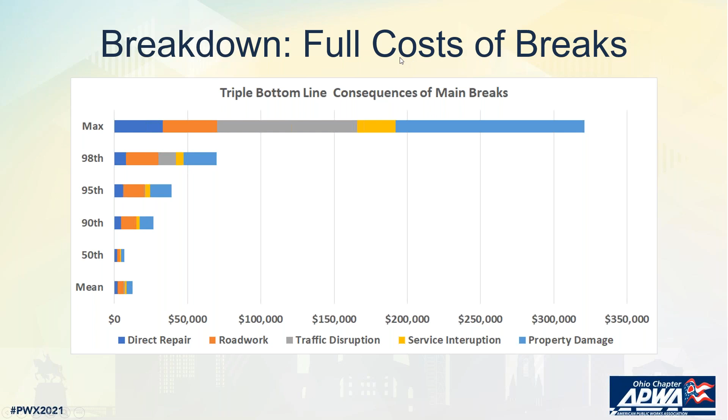The rest of those costs are really societal impacts that you don't feel directly as a utility, but things like traffic disruption, service disruption, and property damage. Certainly for your largest breaks, those societal impacts are much larger. So it's important to understand, as you think about the consequences of breaks, that they go well beyond just the utility.

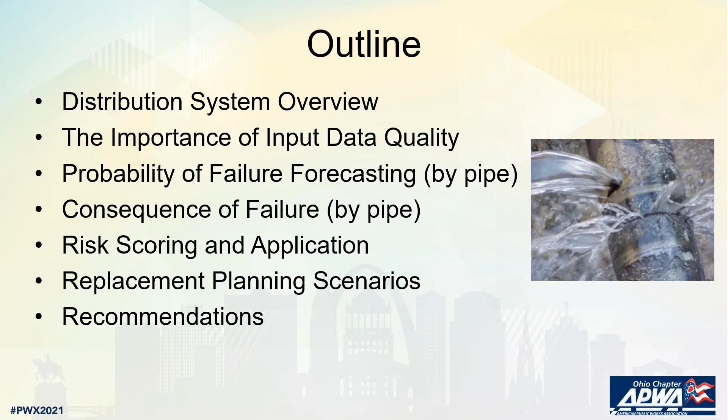And then we'll go over the recommendations that we made for Westerville. It's a very linear presentation, so hopefully you'll be able to follow along fairly easily and see how this might apply to your utility as well.

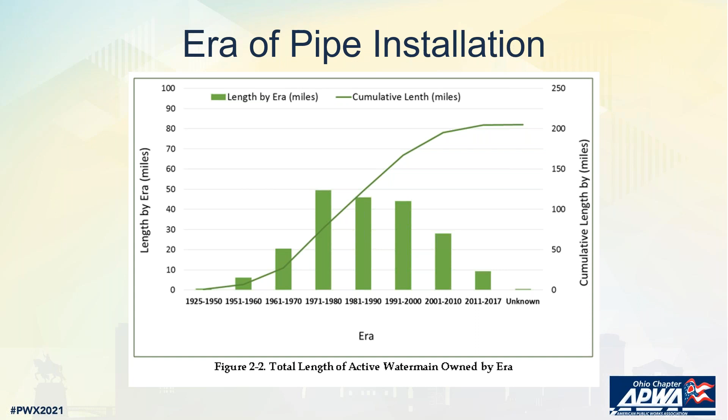So first we'll start with the distribution system overview. This is a graphic that shows the era of installation of the water mains in the Westerville distribution system. Development started in the 50s, ramping up in the 60s all the way to the height of development in the 70s through the year 2000, and then it's been ramping down since then as the city has built out.

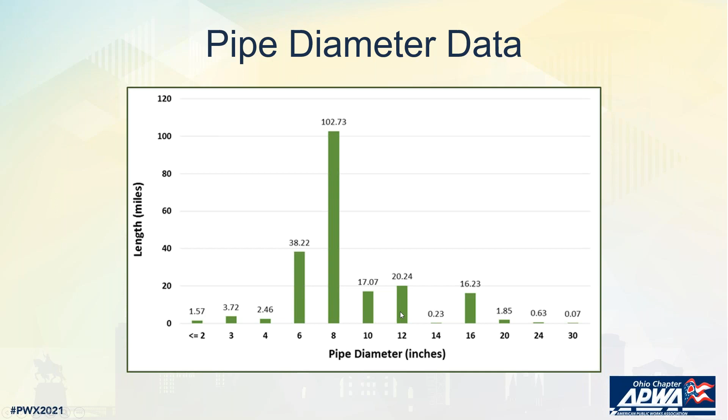So relatively young system by some standards, and we'll see the impact of that in a couple slides here on pipe materials. So looking at diameter of pipe in the system, it's predominantly 6 to 12 inch pipe, with some 16-inch pipe as well.

Based on the era of installation, you can see that the Westerville distribution system is made up almost exclusively of cast iron and ductile iron—almost 99% of the system.

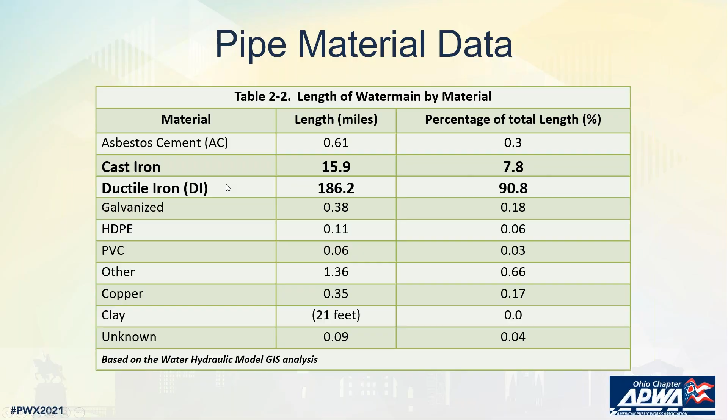Okay, so now we'll talk about break prediction and the importance of the input data and the review of that data. One thing you'll notice here is a screen capture from a software I was talking with Victoria about right before we started the webinar. This software is called Infrasoft, and it's designed specifically for analyzing water distribution system data and break data to make predictions about when water mains will break. It's very easy to actually use this software.

If you've got a GIS, you can basically just import your shape files for the water distribution system. Mostly what you need are very basic asset attributes: era or year of installation, size, and material. If you've got those things in a shape file, we can get started. And then of course you import your break database as well.

So as soon as you import those shape files into the software, you get this dashboard. This dashboard is basically a quality control dashboard. It's going to show you the number of assets, the number of water mains that were imported, and it also tells you if you have data quality issues with those.

For example, there are checks on whether you've got a date of installation for the pipe. If there's no date of installation, it would identify that 34 out of the 7,700 plus pipes didn't have a date of installation. 31 didn't have a material. There were 5 that had a bad diameter. There's a user-defined issue here where there was one pipe with a year of installation of 1190, which was probably 1990, just fat-fingered. So right off the bat, you can kind of see if you have any significant data quality issues.

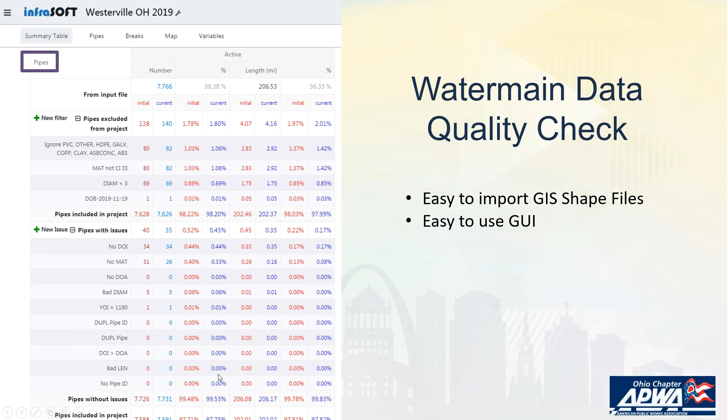What we found with Westerville's data is that there weren't many issues at all—0.5% of the pipes had issues. We have the ability to just ignore and exclude those pipes if we want to, and just move forward with the analysis, making predictions on the 99.5% that are in good shape if we wanted to.

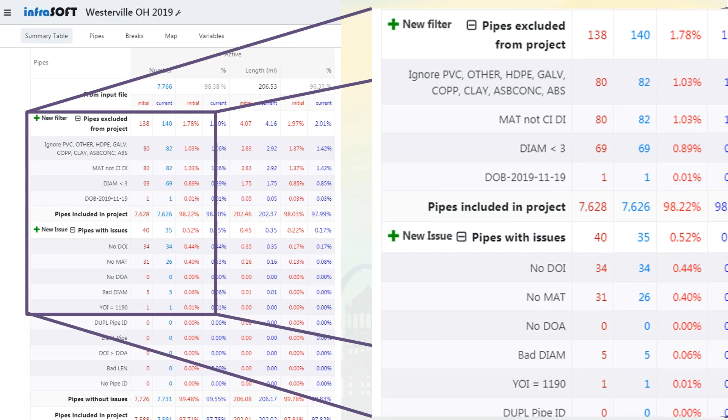Or we could click into this and actually see if we want to resolve any of the data issues. This would be really important if you're a utility that has data quality issues, more so than Westerville did. You can click on these 35 pipes that were identified with issues, and it brings up a list of all of those pipes, showing what those issues are.

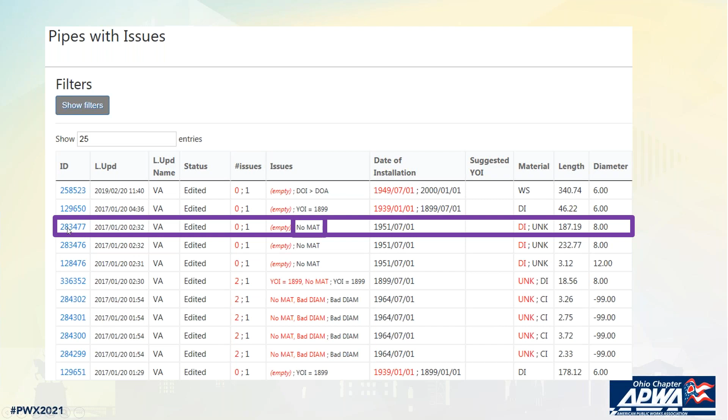I'm going to click on this one. This pipe right here had no material, and it brings up this interactive dashboard. The pipe in question is highlighted in this magenta shade, and I'm able to click on the pipes to either side. I was able to see that all three of these pipes, by the labels here, were installed in 1951. They all had the same diameter, and the pipes on either side were ductile iron pipes. So I was able to click into this and change the pipe material from unknown to ductile iron for the purposes of the analysis.

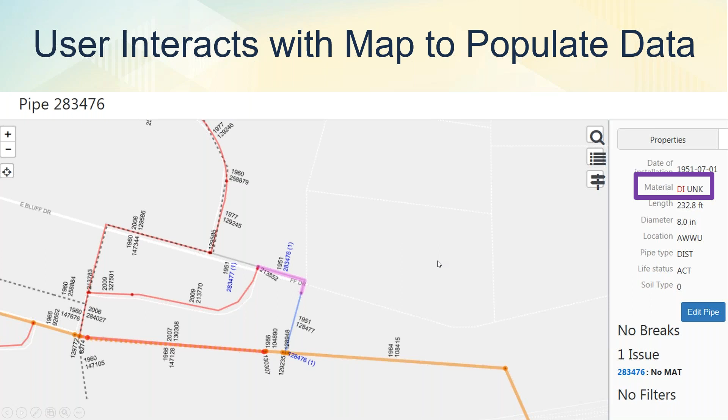As I mentioned, this wasn't much of an issue. I was able to do this manually for Westerville because there were only 35 pipes in question. So it made sense to go through on a one-by-one basis and try to resolve any data quality issues. We were starting with over 99% of the pipes having a known installation date, material, and diameter, as well as an asset ID.

For data sets that aren't in such good shape, the software we use, Infrasoft, has an artificial intelligence module that can populate that missing attribute data. I know for some people, the words artificial intelligence and machine learning kind of make you cringe - they've been overused over the past couple of years. But in this particular case, all it's really doing is following the same logic I went through in that example, where you've got pipes on either side with a known install date, same diameter, and you can make an assumption to fill in the material. Rather than having to do that 100 or 1,000 times with a really bad data set, you can have the artificial intelligence go through the exact same logic for you and save you a lot of time.

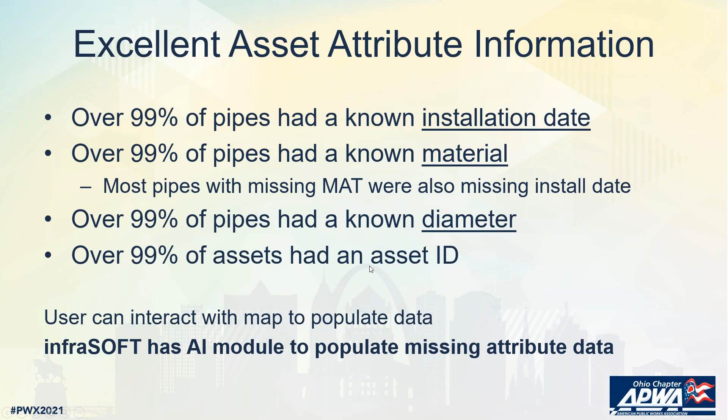It will create a list of issues. It doesn't go back and update the GIS automatically, but one of the secondary benefits of this process is we can take the data from Infrasoft, share that with the utility, and they can make a determination about whether they want to update their GIS as part of this project as well.

Okay, I'm going to jump down to learning objective number 3. We're skipping 2 for now - understanding the importance of utility-specific data. So why is utility-specific data so important?

I'm going to show you - this is for a different project we worked on about a decade ago. It shows for this system, which is a very large system in the Northeast US, what the cost of a replacement plan would be for their water distribution system going out to the year 2050 and the year 2100. You can see the size of that replacement program.

This is based on using industry assumed expected useful lives for pipe. So for ductile iron, maybe the expected useful life is 85 years. For cast iron, anywhere from say 70 to 80 years. Maybe for asbestos cement pipe, it's a lot less than that. But we just went out and used some industry assumed expected useful life values for that region and came up with this replacement program.

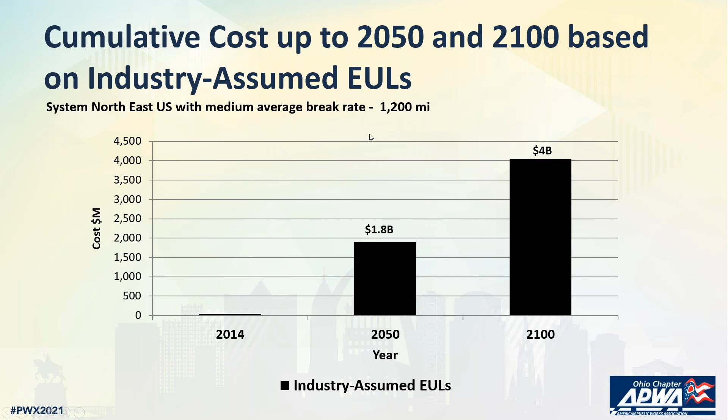Then what we did is we went back and used the asset attribute data and the break data specifically for the utility we were working with on this project. This is what the replacement program looked like in light blue. So we went from industry assumed expected useful lives shown in black to the utility specific expected useful lives in blue, and you can see a 65% reduction in what that proactive replacement program looked like - a reduction of $1.2 billion for them, and by the year 2100, about a $2 billion savings.

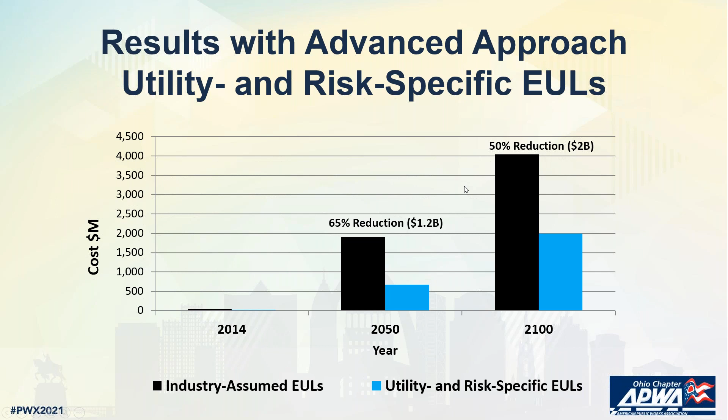I will say this is not necessarily going to be the case for every single utility. It could be that you've got particularly fragile pipe and that light blue bar might be higher than if you had based your replacement program off of industry assumed expected useful lives. In most cases, in my experience, it is lower because those industry assumed EULs, in my opinion anyway, are a little bit conservative. So it's a big push for you to use your own data to develop your replacement plan.

Your pipes are going to behave differently as well based on a lot of things - based on who installed them, who the manufacturer of the pipe was, what are the soil conditions, do you have aggressive soils, how do you operate the system and so forth. So it's really important to use your data if you can.

Okay, so let's talk about how we use that data now to make predictions about when pipes are going to fail. This is some data from Westerville again. This shows the average annual break rate based on the year, starting from 1988 all the way up to 2019. You can see this break rate.

Even in 2019, 2018, when we did this project, it's not a significantly high break rate. In fact, it's probably about the 25th percentile in the US, but you can see this big change starting at about 2009, 2010, where it really started to accelerate, and that's what drove this particular project.

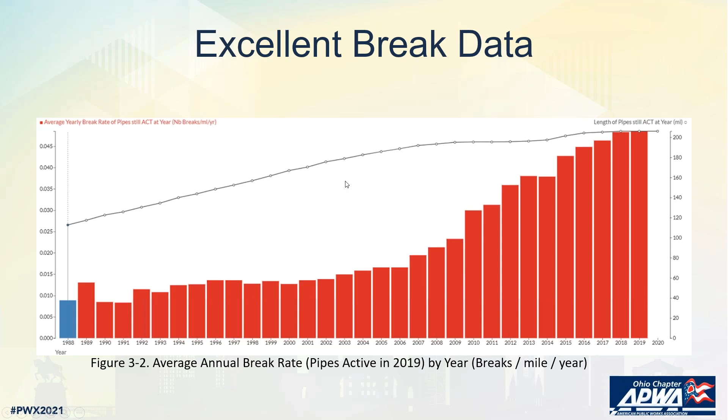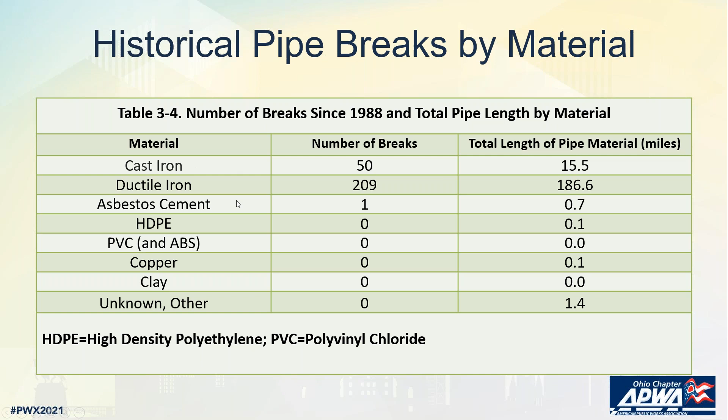So when we looked at historical breaks, what we found is because this system was predominantly cast iron and ductile iron, there was only one break on all of the other materials. So in terms of using predictive software, we couldn't use that software for HDPE, PVC, copper, clay, etc., because you can't make a projection based on one or zero breaks. We really focused in on cast and ductile. For those other materials, you can go out and use the industry assumed expected useful lives. But for the 99% that's cast or ductile, we imported break data to start to form the basis for the predictions. Same type of dashboard comes up as part of the Infrasoft software when you import the break data.

So it looks at issues like, is the date of the break on the pipe before the installation date of the pipe? Obviously that can't happen. We found 4 pipes where that was the case. It could just be that the pipe was replaced at some point, so the installation date was updated, but the asset ID didn't change.

We also wanted to exclude utility hits. What we're trying to do with the software is predict the degradation of pipes. A utility hit can be excluded from that because it's just going to skew the results.

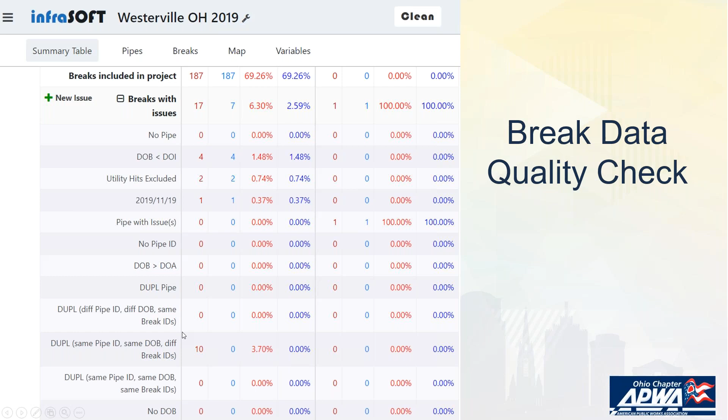We had a date of a break of 11/19/2019. That was after we started the project, so we knew there was a mistake there. And then we looked at a few, there were some duplicate breaks - same pipe ID, same date of the break, just a different break ID. We think we were able to verify that there were 5 breaks that were just entered twice. So we were able to exclude those breaks from the analysis so we didn't skew the results.

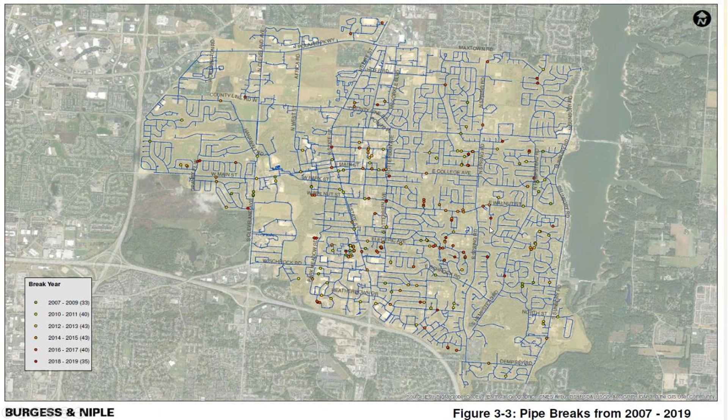All of this is done, and you can display all of this on GIS. The Infrasoft software talks back and forth with GIS, and in some cases it can help you visualize where there are some clusters of breaks in some areas and where there are less in other areas.

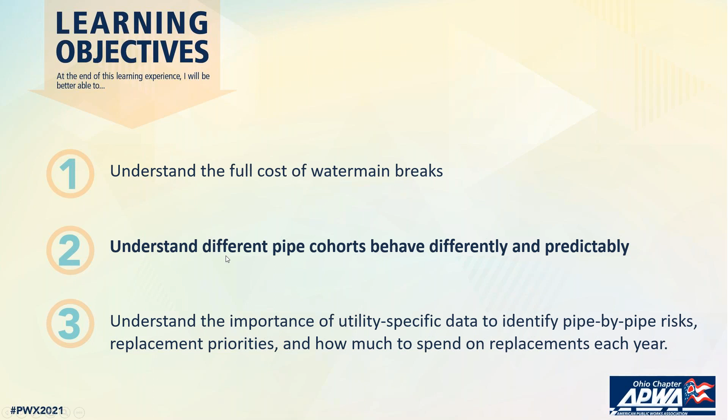Okay, so let's talk about how we use that break data and determine which pipes are behaving really well and which ones might be representing the biggest risks and problems to the system. We can see through the software there are a number of automatically generated graphics that we use to help us with our analytics. The first, we look for a relationship between the break rate and material.

As you would expect, break rate is very heavily correlated with the material of the pipe, and we can see that here. We've got cast iron in green, ductile iron in red, and the height of the bars represents the break rate. For cast iron, it's about 16 to 17 breaks per 100 miles per year. For ductile iron, it's a little bit less than half that - just under 8 breaks per 100 miles per year.

The age of the pipe is shown here by this line. We can see that the average age of ductile is about 30 years old, and the average age of the cast is a little bit over 50 years old.

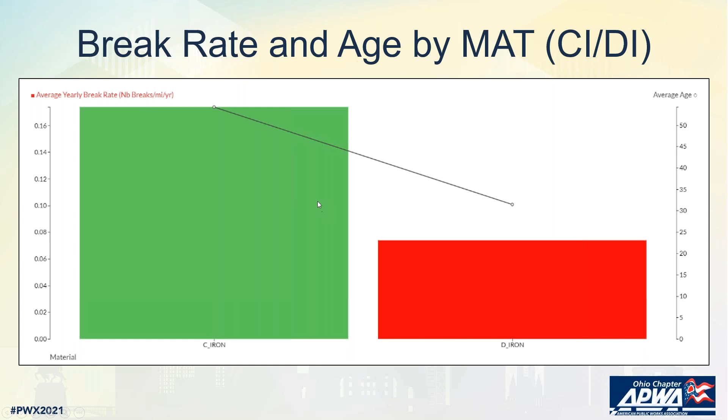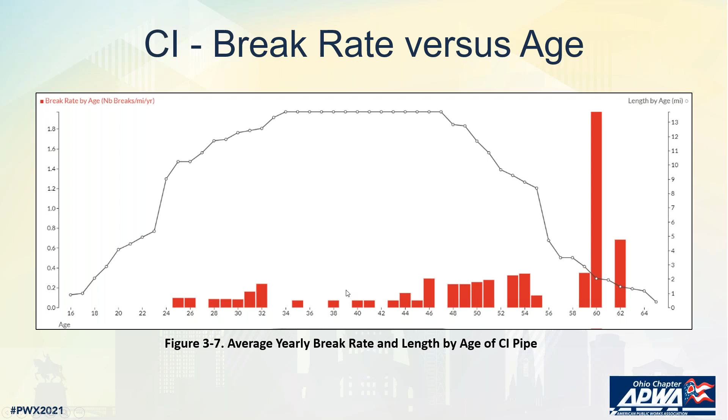We also looked at the break rate versus age. We've got the age of the pipe on the x-axis here, the break rate on the y. As expected, we were able to see a trend in the rise in the break rate as the pipe aged. This is for cast iron specifically, but we wanted to make sure we're seeing these trends that we expected.

We also look for a relationship between the break rate and the diameter of the pipe. Generally speaking, larger pipe has a larger wall thickness and therefore degrades at a lower rate and will have a lower break rate. That's exactly what we found with the Westerville data as well.

So the 4-inch pipe on the left here has the highest break rate. There's a little bit of an anomaly with the 8-inch pipe, but you can see the general trend is down. Break rate goes down as diameter goes up.

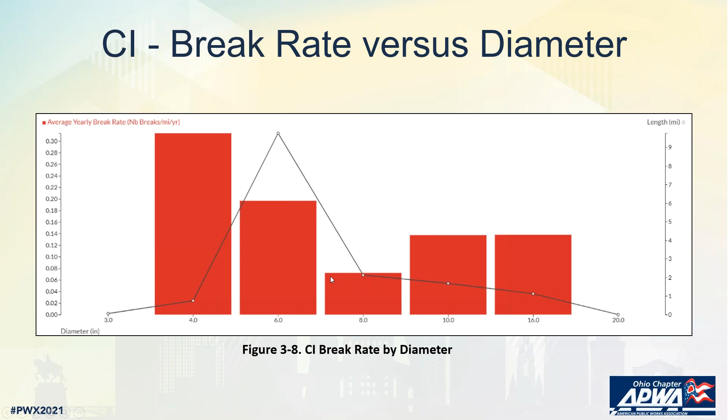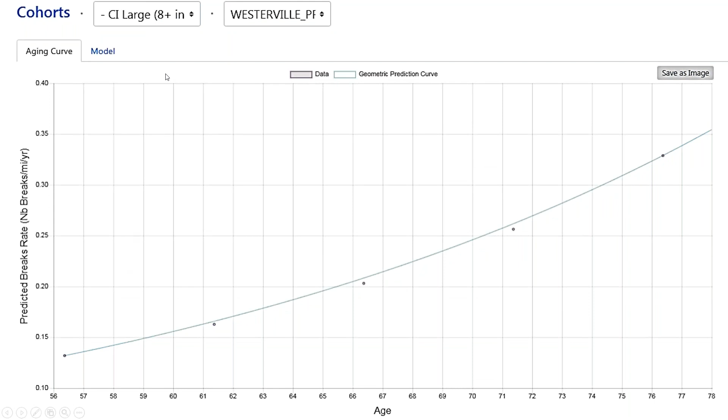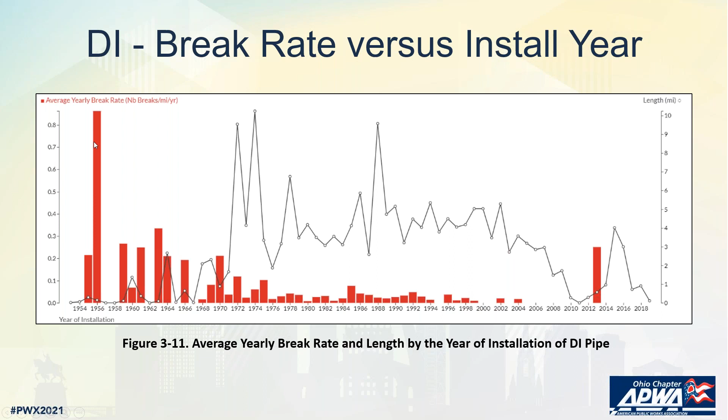We can develop these for large cast iron pipe, same with ductile. This graphic shows, rather than graphing break rate versus age, we graphed it based on year of installation. So the oldest pipe, going back to 1954, 1956, is breaking more frequently than the more recently installed ductile iron pipe.

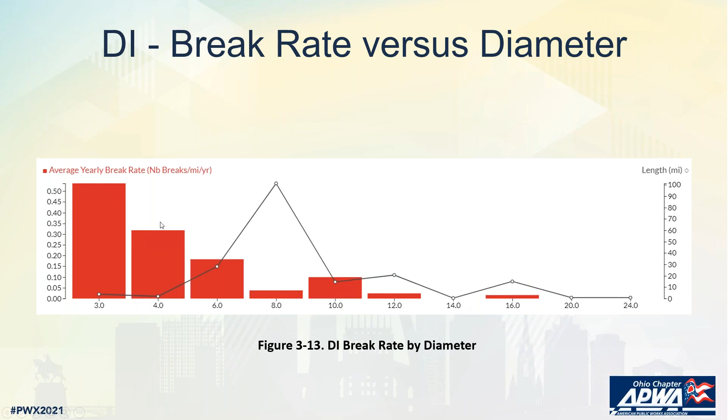This is the relationship of ductile iron break rate versus diameter. Same trend, where the larger the pipe, the smaller the break rate. And we can build these to show how different cohorts of ductile iron pipe are behaving.

In actuality, what's happening behind the scenes in the software is that there is a specific probability of failure being predicted for every single pipe in the system. So you could go to an asset ID, a specific pipe, and it would tell you the probability of failure in 2020, 2025, 2030, all the way out as far as you want to look.

Extremely powerful. When we bring that all together, we can make predictions about what the break rate in the entire system will look like under the do-nothing scenario, where you're not doing proactive replacement, just repairing breaks. You can see the break rate would rise pretty significantly, and that's what Westerville was really concerned about, like we talked about at the top, that they saw this rise in break rate.

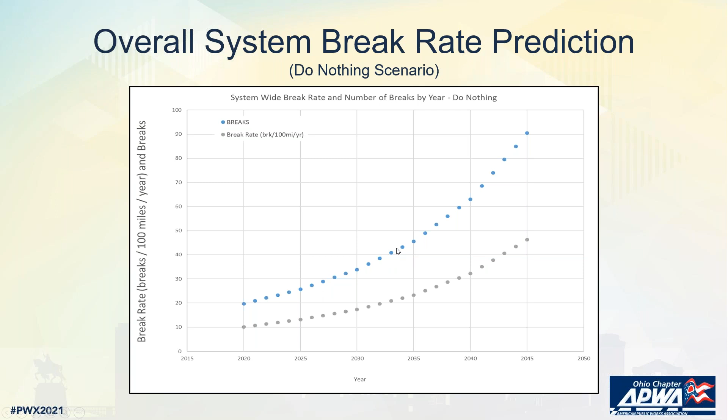What this says is from the year 2020 to about the year before 2035, the break rate was expected to double if nothing was done. So that's where the major concern was.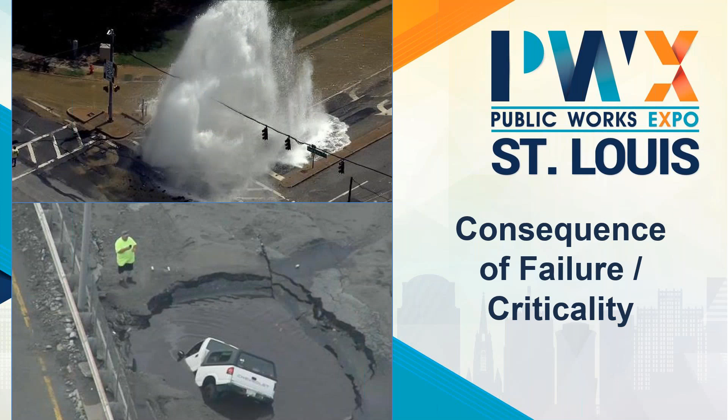All right, so let's talk about the other part of the risk equation. We talked about the probability side. Let's talk quickly about the consequence side.

There are a lot of factors that impact the consequence of failure when water mains break. So the diameter is something we look at because it's an indicator of what the potential property damage might be, what the repair might look like, and the number of customers that might be impacted by that break.

We also look at proximity factors. This is just done in GIS, where we look at different layers and how they overlap with the pipes. So are there intersections with roads, water bodies, structures, railroads, and other things that would increase the cost of the repair based on the complexity of the repair that would be done.

And then we also look at hydraulic consequences. What I mean by hydraulic consequences is when you have to do the repair on that main, if you can't do a live repair and you have to isolate that main, you close the valves. The users on that pipe will lose water service, and so we can estimate what the impacts to them are.

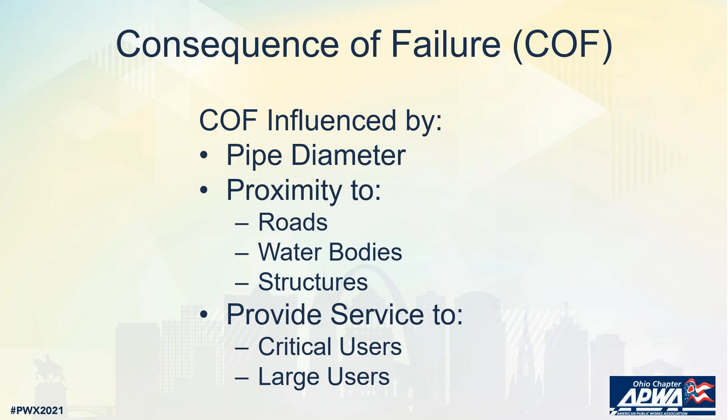So hydraulic and physical consequences, just kind of a look at how we do that. We use a 1 to 5 scoring system for each of these criterion.

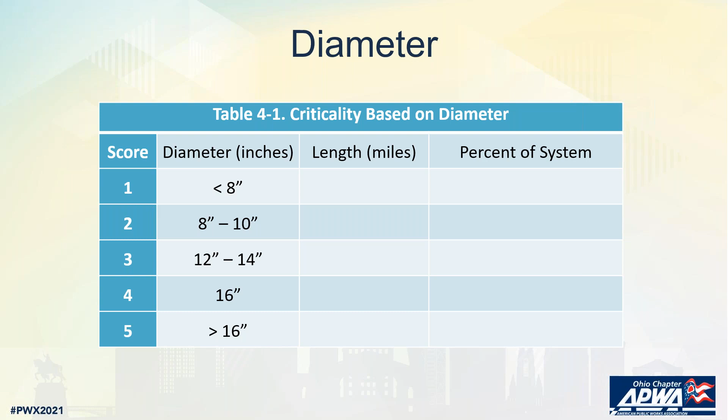This is just an example based on the diameter of pipe. If it's less than 8 inches, it could get a score of 1, all the way up to a score of 5 for a 16-inch or greater than 16-inch pipe. This 1 to 5 scoring system is pretty much industry standard through most asset management texts. This is how consequence of failure is often scored.

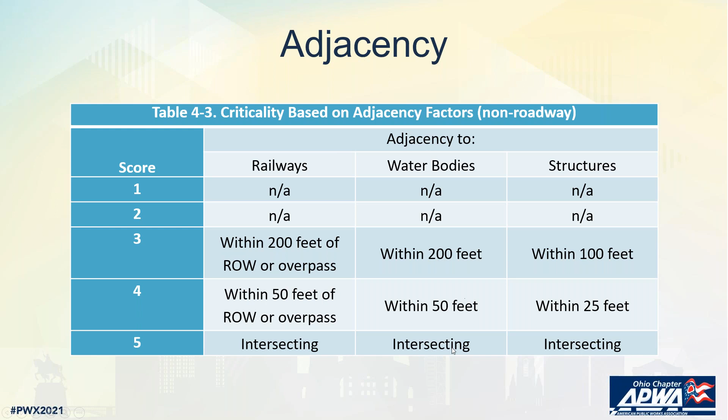Looking at adjacency to things like railroads, water bodies, or structures, you can set up similar criteria. So if you were looking at a water body, you could get a 0, or if the pipe is within 200 feet of a water body, a score of 3. If it's within 50 feet, a score of 4. If it's intersecting, it would get a score of 5.

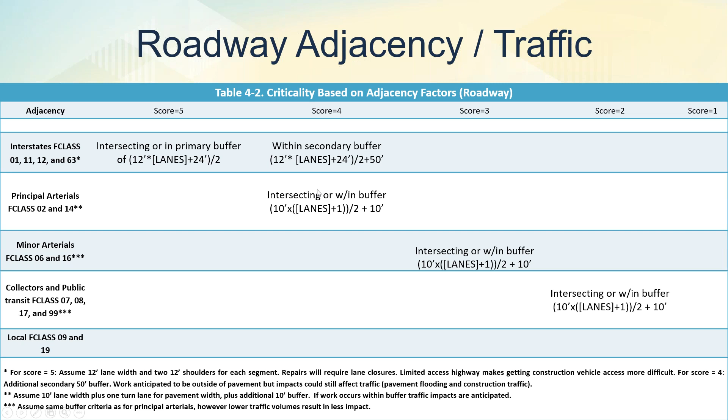If it was intersecting or within a primary buffer of a principal arterial, it would get a score of 4, and so forth. Scores go down as the classification changes.

Lastly, we can look at critical customers. Again, this goes back to hydraulic consequences. If you've got critical users that are wet businesses in your city, you'll want to know where they are and what pipes they're on. Examples are bottling companies. When I worked for City of Columbus, the Budweiser manufacturing facility was by far the largest user and the most significant customer, so there would be major consequences if they lost water service. But it could be other wet businesses too, like schools, hospitals, or dialysis centers where water is extremely critical to their operation. You can see how we gauge the impact based on what type of critical customer it is.

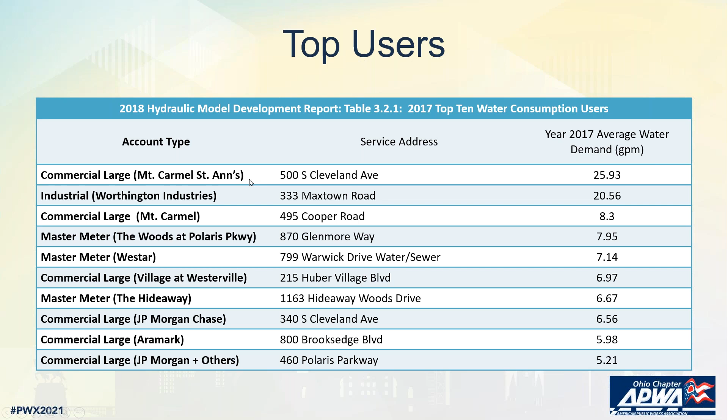We look at large users as well. This is the top 10 water users in Westerville, a summary of those top 10, and the pipes these customers are associated with were listed as high criticality pipes.

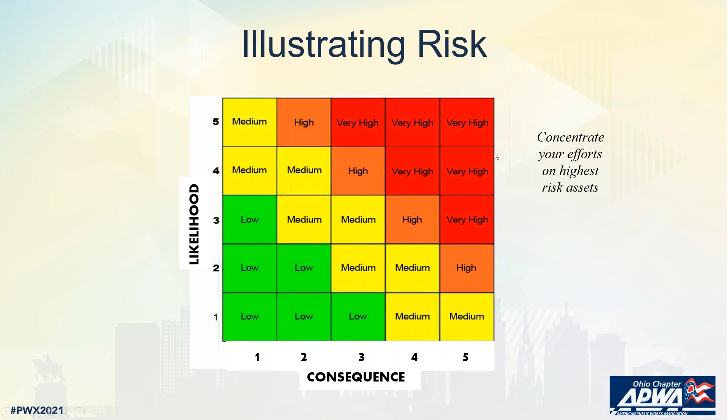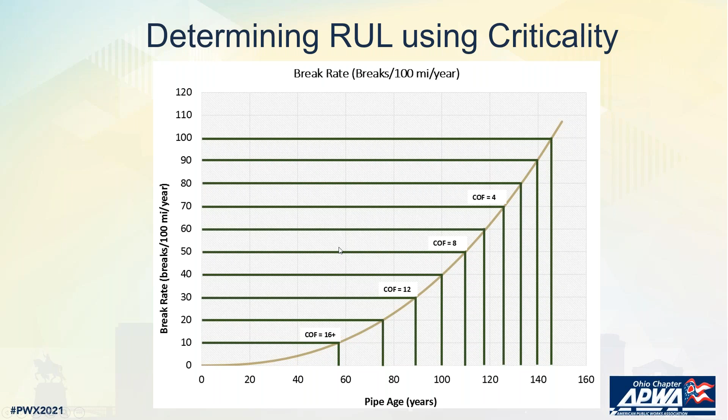So we can do this for every single pipe, and when we do that, it gives you a replacement plan for every pipe in the system. This is just a tabular way of showing what those green bars were. Each utility can adjust this, but it basically means we looked at consequence of failure scores from 1 to 20 and made a decision about the maximum acceptable break rate for pipes in each of those consequence of failure bins. That's how we developed that graphic.

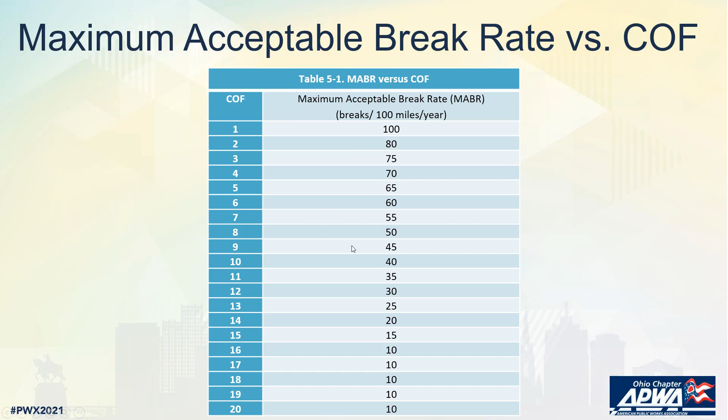We used that Water Research Foundation study I showed you at the very beginning, where they studied the true cost of water main breaks, and we were able to put dollar value costs on each of those breaks. We multiplied the cost of the breaks times the probability to come up with a monetized risk score, which becomes really important when deciding how much money you want to spend to replace pipes.

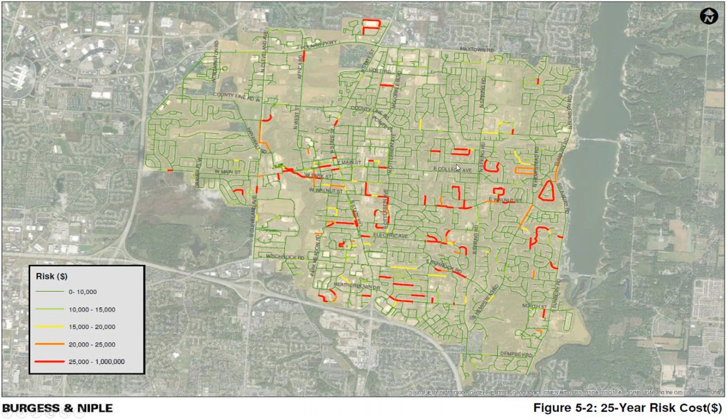Okay, so let's talk about some different replacement scenarios, and we'll wrap it up after that and show you the recommendations we made for Westerville.

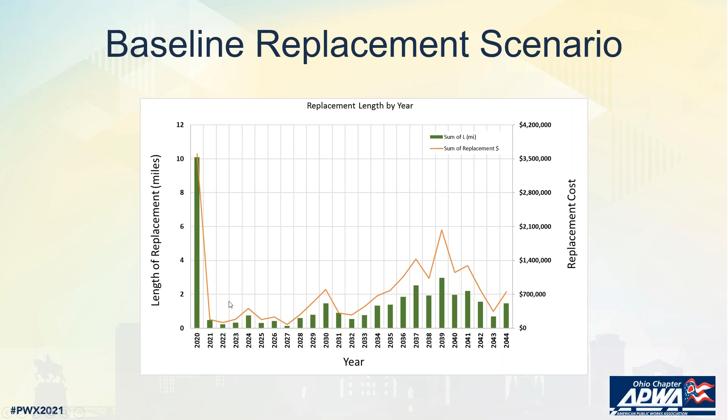These are actual replacements where we selected actual pipes. In green you see the sum of length we recommended be replaced in any given year, and the gold line represents what the investment level would be in each of those years.

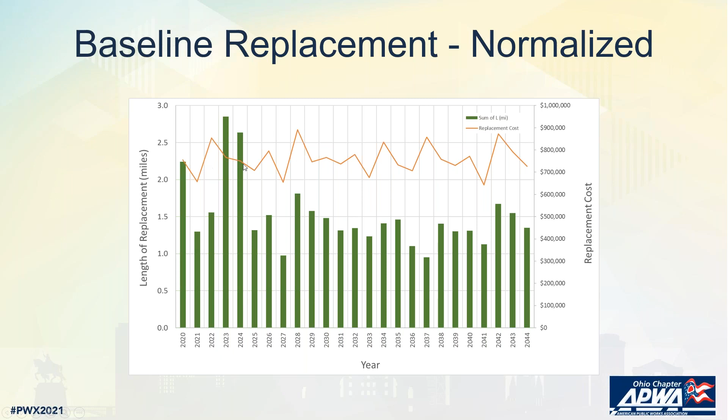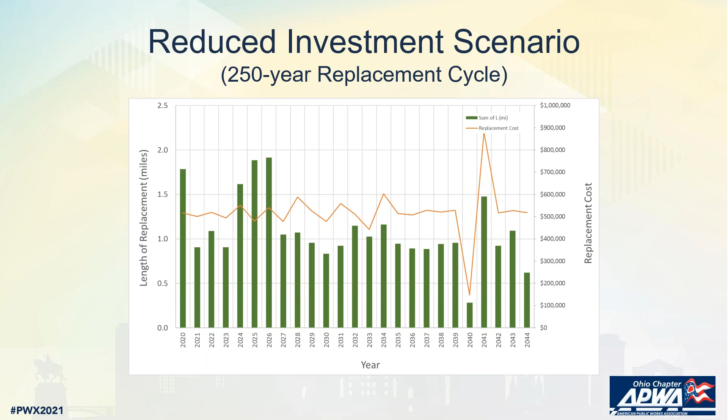We also looked at a scenario where we reduced the investment - instead of about $750,000, what if we reduced the average annual investment to $500,000? We wanted to see what the impact would be on the system-wide break rate over time, the number of breaks that would occur over time.

The number of breaks that would occur goes way down, then starts to rise again. The lowest cost, $500,000 per year investment, which represented about a 250-year cycle to get through the entire system - for obvious reasons, it doesn't have as big of an impact on the break rate early on.

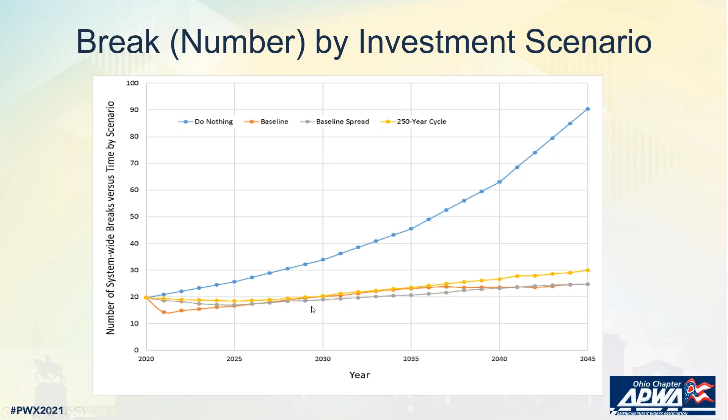But what we do see is a convergence, a pretty significant convergence around the year 2030. It starts to spread a little by 2035. But this told us that we really could get away with the lower investment level at the beginning, and then come back and reevaluate the investment rate in the year 2030.

So that is, in fact, what we did recommend - the 250-year replacement cycle. We know that's not sustainable; pipes don't last 250 years. But what we did was validate this recommendation.

We were able to look at the data and show that by replacing 5% of the length, it would avoid 36% of the future breaks between now and 2030. So what's happening in the Westerville system is there are a few really bad actors, some really bad pipe. If you address those early on, you'll address a majority of the breaks, and then you can go back in future years and reevaluate the investment scenario.

Again, the existing break rate is low right now, even though it's rising, and that was also another justification for starting out with the lower investment rate.

What we did after this project, as far as recommendations, was work not only with the Public Service Department, but also with the Planning and Development Department, and we correlated our recommendations to future paving projects to try to align those projects together and avoid costs like repaving costs.

So the city is continuing to track breaks, and they're going to reevaluate the replacement strategy. At the time, we talked about reevaluating within about 3 years, which would be this year or next. We also discussed changing some data management practices for abandoned mains.

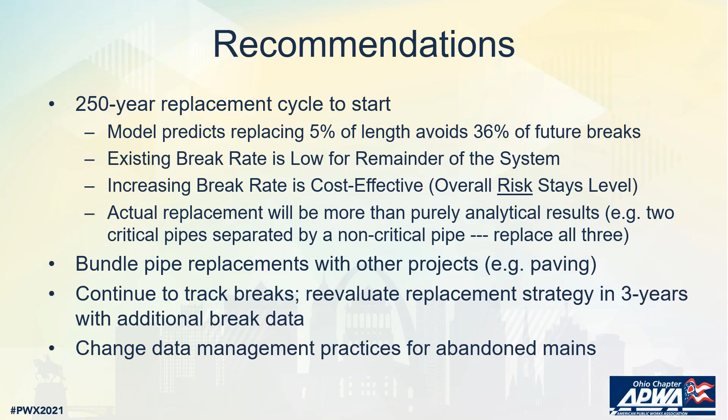So I put the word out now to folks listening: if this is something you're considering, you should think about preserving data for abandoned mains. That's what Westerville has been doing over the past few years, so that when it comes time to do the reevaluation, they'll have more data to work through.

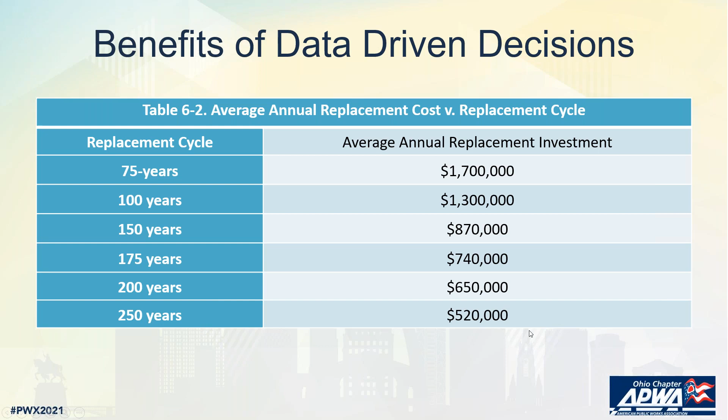So again, we just looked at these different investment scenarios. There was the baseline scenario, and ultimately we looked at that 250-year scenario, as I mentioned, and it came out to be about $520,000 of investment.

So why would you look at this advanced risk-based approach? Number one, more accurate projections, as we showed when you compare industry-assumed expected useful lives versus using your specific data. Number two, optimization of resources and savings - we were able to justify a much lower investment.

This type of tool, the analytics that we did, obviously gives you a lot of granularity, as opposed to just using 1 to 5 scoring systems for probability, where some folks are using just a 1 to 5 scoring system to determine when pipes are failing. If you use our approach and this software, you can get pipe-by-pipe probability of failure numbers, which gives you a much better ability to prioritize where you want to go in and do replacements.

We were able to explore different funding options, and I think one of the most important things is when you do this type of analysis, you've got a lot more confidence in your results. They're a lot more defensible, justifiable, and you can go to the powers that be, whether within your organization or to a city council requesting funding - if you need justification, this type of analysis provides it for you.

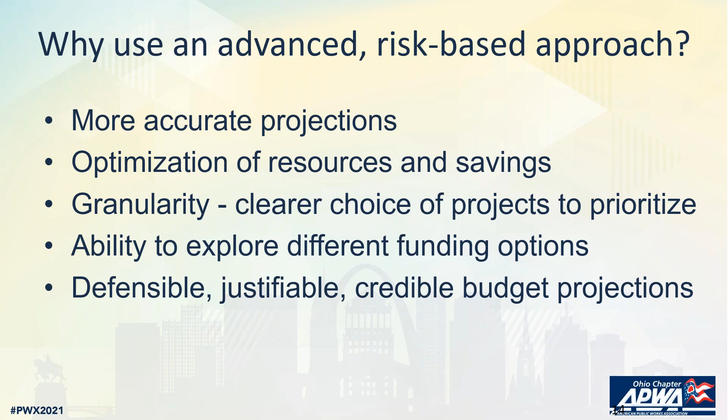I remember Dick Lorenz, one of the engineers at Westerville, saying going through this process finally gave us the ability to provide that number to City Council with some confidence and to justify that budget. So that's another benefit of the program.

So last but not least, my last slide here is something I took from PWX 21 last year. Right before I gave this presentation, there was another presentation about communicating, and it said 65% of the population learns visually. We remember only 10% of what we hear, 30% of what we read, and 80% of what we see. That's just another bit of advice for folks thinking about this type of program.

Those failure curves that we were able to generate through the software, the aging curves, as well as the risk graphics and maps, are extremely helpful in communicating up and out of your organization to justify these types of programs as well.

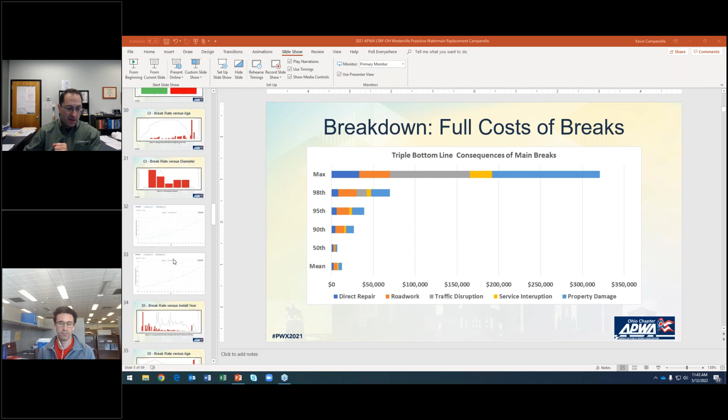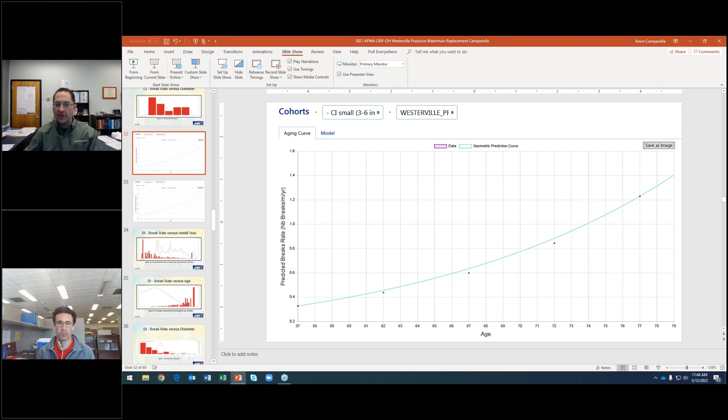I think by taking your existing information, meaning your asset attribute data and your break data, you can look at the break predictions on a pipe by pipe basis, but I showed those aging curves. Let me scroll down to some of those aging curves here. Right, so we had these aging curves that we showed for ductile, small ductile, large ductile. We had the same aging curves for cast iron. So based on the analysis and your understanding of how different materials perform in your system, we could make some recommendations about what would be best as far as replacement material.

There are some trends, obviously. If you go out and look at either Buried No Longer, which is an AWWA publication, there's a Utah State study that comes out every few years on pipe performance by material. For most communities, asbestos cement pipe was a horrible decision. Ductile iron pipe in most cases is a very good decision, particularly if you have it lined on the outside. A factory protective coating on the outside, I should say.

If you think you have aggressive soils, that would be something we would recommend. If you don't have aggressive soils, you might not need to pay for the protective coating from the manufacturer. Although I think we've heard from a number of manufacturers that they may make that standard in the future for ductile. But certainly you can take a look at this data and figure out what might be a good replacement material. I wouldn't do it without looking at your data.

Next question here is, did your water main replacement cost calculation include all costs such as backfill, pavement replacement, water service replacement, valves, hydrants, etc.? The costs that I showed, these investment costs at the end, when we looked at the different investment scenarios, the $500,000 level, $750,000 level, those were just direct costs. They didn't have the add-ons of engineering and mobilization, construction, administration, and so forth. So I think we added about 25 to 30% onto those costs, if I recall correctly, to get the overall soup to nuts cost to the city of Westerville.

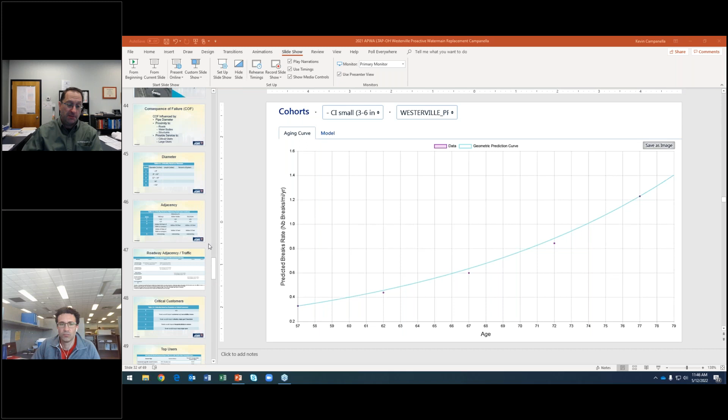Yeah, okay, so that's a great question. So service interruption, and I'll talk about a couple different ways that we can do that. Let me see if I can bring that up. So this is maybe a good way to explain that, Josh. When you have a break and you have to isolate that pipe to do the repair, you're going to interrupt service to potentially a variety of different types of customers. If they're residential, the impact is typically small. It's obviously a lot smaller if you can notify them, as well, if it's a planned repair. But when you have unplanned repairs, the impacts can be fairly significant.

And so we've got these types of customers in these different bins, 2, 3, 4, and 5. This goes back to that Water Research Foundation study, where we actually called all of these types of customers, and we asked them the types of consequences that they suffered, if you will, or experienced as a result of an outage.

So for example, a break that would impact a school. About 2 miles south of where I am right now is a middle school, I think it's called Hastings Middle School. There was a break there a couple of years ago. It happened at about 7:30 in the morning, right after all the kids got dropped off for school.

So we talked to their folks about what the impacts were. They had to deal with shutting down water in their school and the consequences of that. They had to close the school because they had no fire protection. So they had to send all these kids home, but you can't just put kids on a bus and send them home because you don't know who's waiting back at home. You don't even know if they can get in the house.

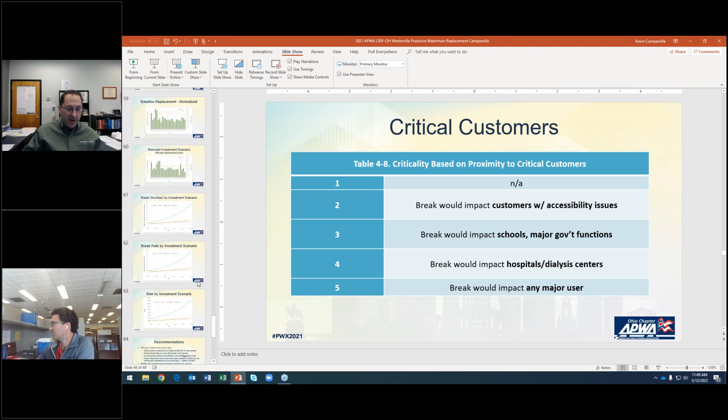I think one point on that, Josh, too - it just triggered a memory when we did this presentation in St. Louis. Director Kevin Weaver was there, he's the Director of Public Service at Westerville, and he said one of the other values that came from this study wasn't just understanding what pipes to replace, but what pipes not to replace.